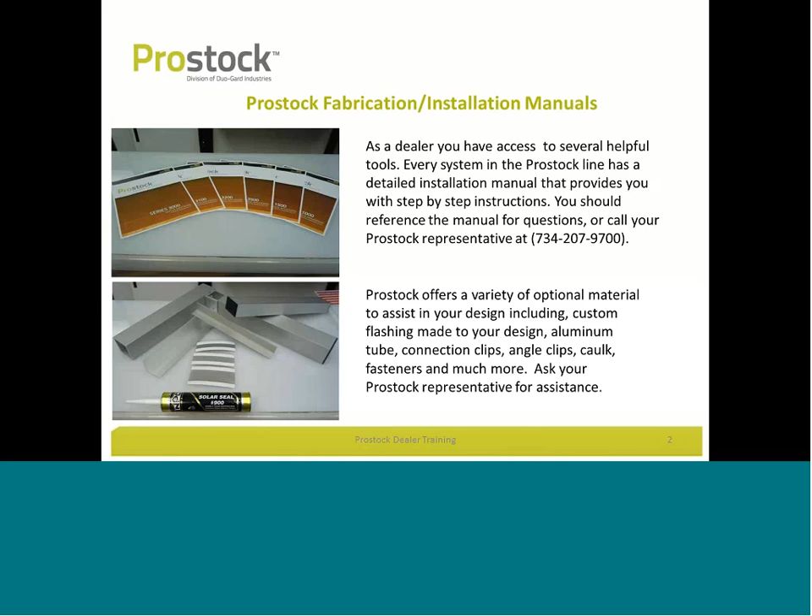When ordering material, there are two documents we'd like you to look at. In your toolbox, you'll find the Prostock Performance Matrix and the Prostock quote request form. Both forms, and all documents within the toolboxes, are specific to the system you're selecting. Having them side by side when filling out the order form might be easier, so printing one and using the other on screen can be a handy way to complete the order request form.

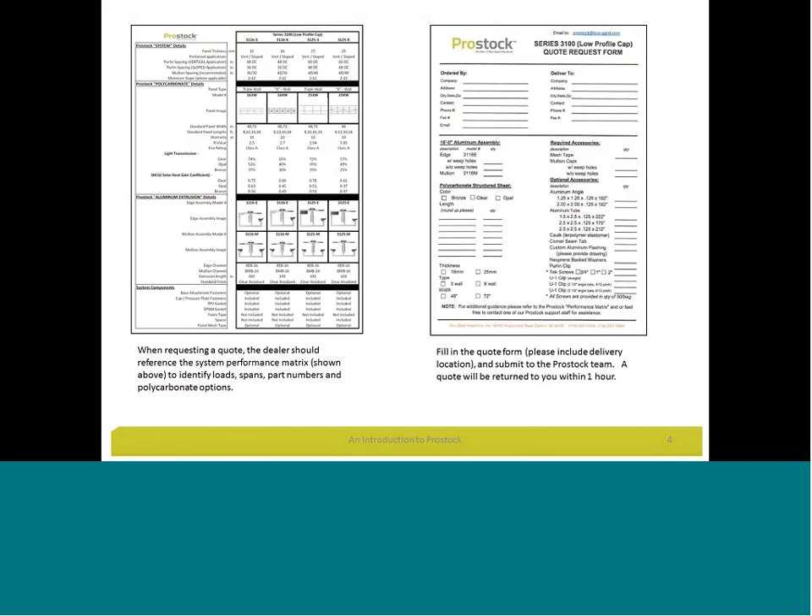When asking for a quote in Prostock, we ask that you do not submit drawings or specifications. Call us for assistance instead. We'll help you with selecting a system, fabrication guidance, and installation guidance.

When your quote request is complete, fax or email it to Lori here at our office. She'll confirm receipt of the order, run it through our Prostock pricing calculators, add shipping and handling charges, and all the details necessary to make sure your quote is submitted back to you within an hour of receiving your request. Remember, we ship Prostock materials as quickly as 2 weeks, so our lead time is very short.

Here's another example of a completed quote request form, just to give you an idea how it works. You fill in the ordered-by information, where you want the materials shipped to, and then check the boxes to identify the amount of polycarbonate sheet you'd like and the length. Please round to the nearest foot for your panel length.

There are some required accessories. We suggest you use mesh tape, so we show that as a required accessory. If you're putting in mullions, you'll need mullion end caps. We also make some of our edge channel and mullion end caps with weep holes already prepped, so if you have a chance, please identify the amount of prepped material you'll need, and we'll ship that accordingly.

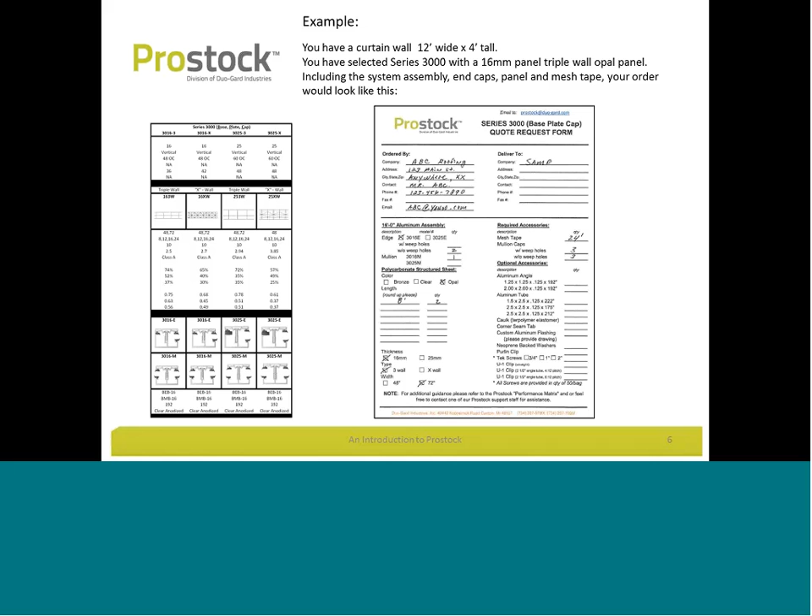Installation details. We're going to bring you 30 years of daylighting experience in the use of these channels, and we'd like to share that information with you now. There are a lot of key elements to working with polycarbonate structured sheet and our aluminum channel systems that we've learned over these many years.

It starts with flashing your system. We recommend that when you install your flashing, you install it about an inch, maybe an inch and a half, above and beyond the system. Any water that might weep or leak into the system won't go into the finished product, but will actually weep out through the pre-drilled weep holes.

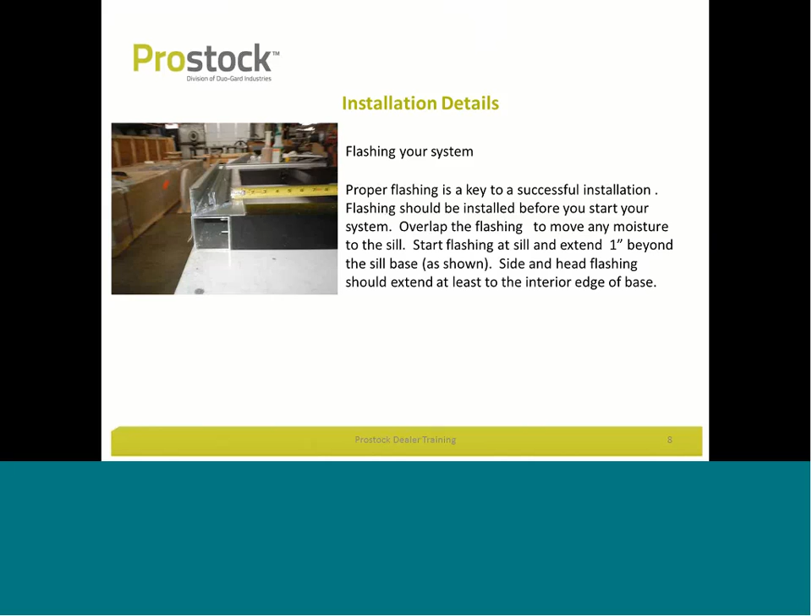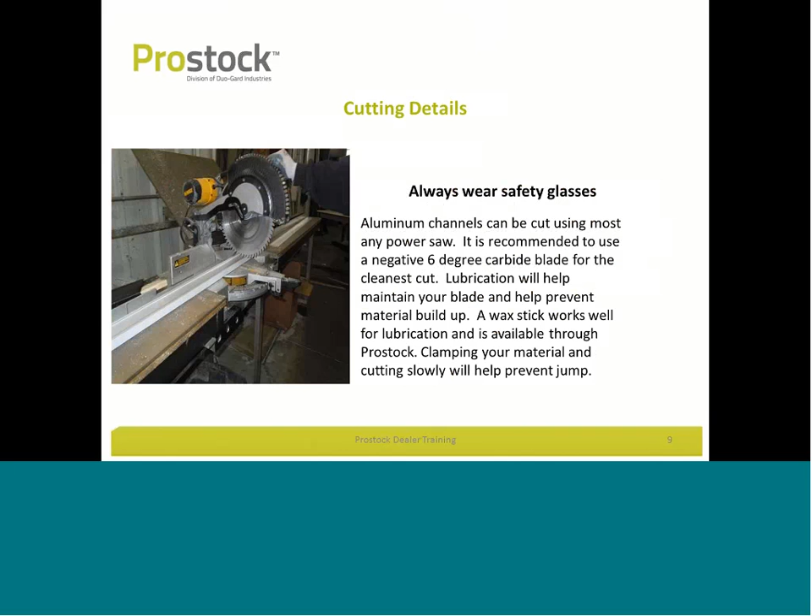When cutting aluminum, many of our fabricators certainly understand how to do it—this is no secret. We recommend using a negative 6-degree carbide blade for the cleanest cut. A little wax lubrication will help the cutting process and prevent your material from jumping. We always recommend wearing safety glasses in the process.

Weeping details: a lot of our material comes prepped, and one area we prep is drilling some of our channels with weep holes. However, if you prefer to drill those yourself, we recommend drilling a couple of holes within an inch of each other using the bit size identified here, about every 24 inches. The important thing is that you drill not only through the base channel but through the screw boss as well, so any water making its way to the other side of the screw boss will find its way through the weep holes.

Notice the mullion cap in the picture below. The mullion cap comes in two fashions: one with 2 weep holes in it, and one with no weep holes. The mullion cap with weep holes will fit at the bottom of the mullion, and the one without weep holes at the top.

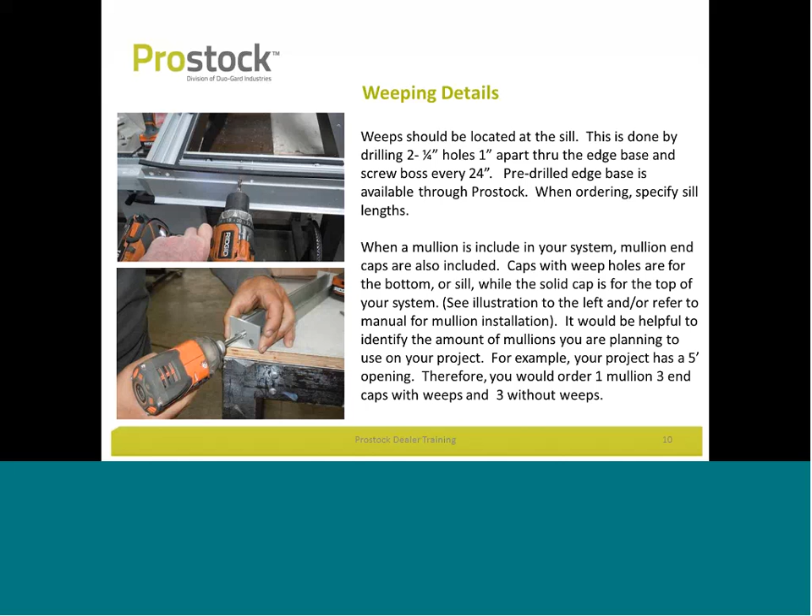Caulking details. Just to make a quick note here, our systems are all dry glaze systems, so typically you do not caulk at all where polycarbonate and aluminum come together. There is one exception, which we'll go into in a few minutes.

Where caulking can be used is when the channel is built and the corners are built with the aluminum. You may want to caulk in those corners, as shown in these pictures. Make sure you don't caulk near the weep holes so as to block them at all.

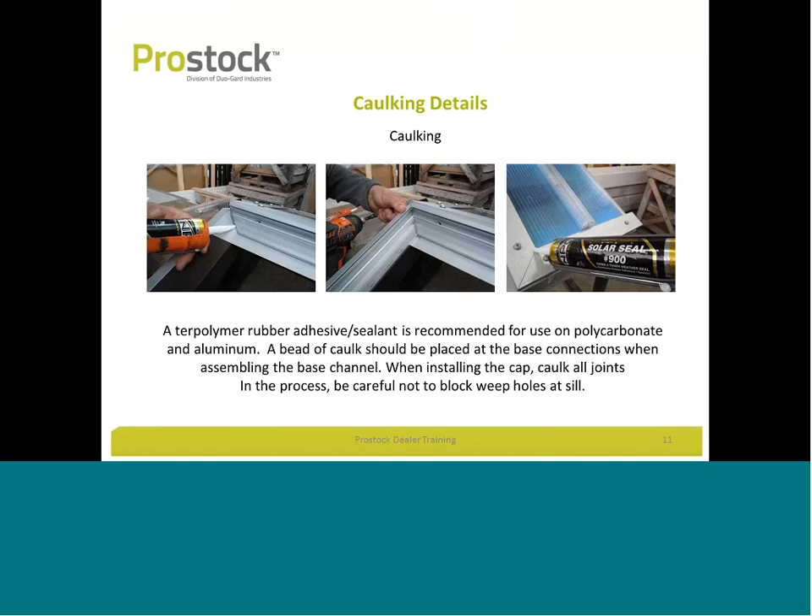If you try to stretch it or roll it in place, the gasket will stretch. When you cut a 16-foot piece of gasket and roll it in place, you end up 3, 4, or 5 inches beyond the edge of the aluminum 16-foot channel. You've stretched that gasket, and gasket has memory—it'll stretch back, causing potential for leaks. So make sure you use your fingers to carefully place the gasket and press it into place.

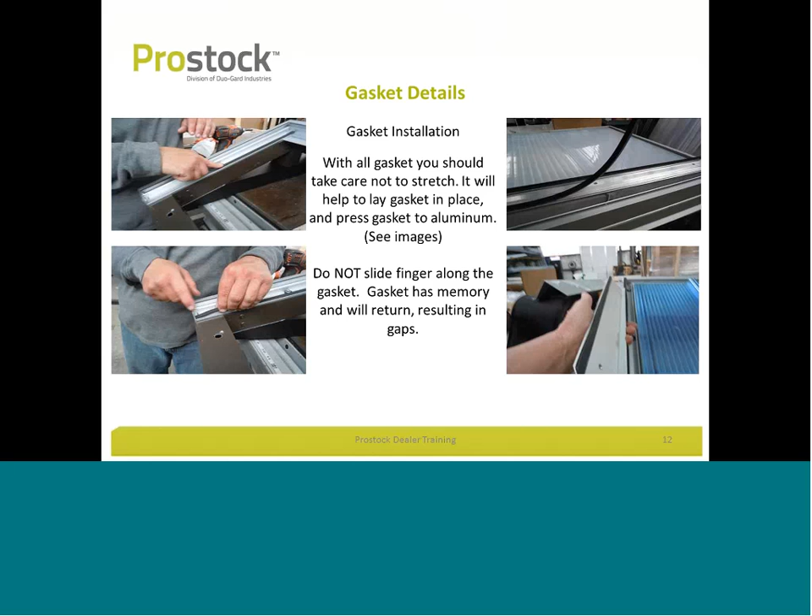Polycarbonate details. There's a lot of information here to read and review. I want to hit on some of the highlight points here.

Cutting polycarbonate is as simple as using a plywood-type blade. It's a very simple process, cuts easily. Make sure that you leave the lining on the film. The protective lining must remain on the film because that lining tells you which side of that panel is UV protected. Do not pull the lining off until you're complete with the project. What we recommend is using a razor blade to simply cut back about two inches or so of the film as you're installing and fabricating.

Leave the liner in place. Once the project is up and complete, then you can pull that top liner off, knowing that the UV protected, or ultraviolet, side is displayed up and in the right position.

Keep in mind that polycarbonate structured sheet expands and contracts, so refer to the manual for cut sizes. Give yourself a little bit of room for expansion and contraction. It expands and contracts greater than glass, so be careful not to make the system too tight.

Do not leave the liner exposed to direct sunlight. That protective film—when you receive the panels, do not store them outside or in direct sunlight. Make sure they're in a controlled environment prior to installation. What will happen is the liners will actually bake onto the sheet and you'll have a damaged panel. So keep the liners on, keep the panels in a safe, dry, dark environment, and only pull that film off when you're ready to install.

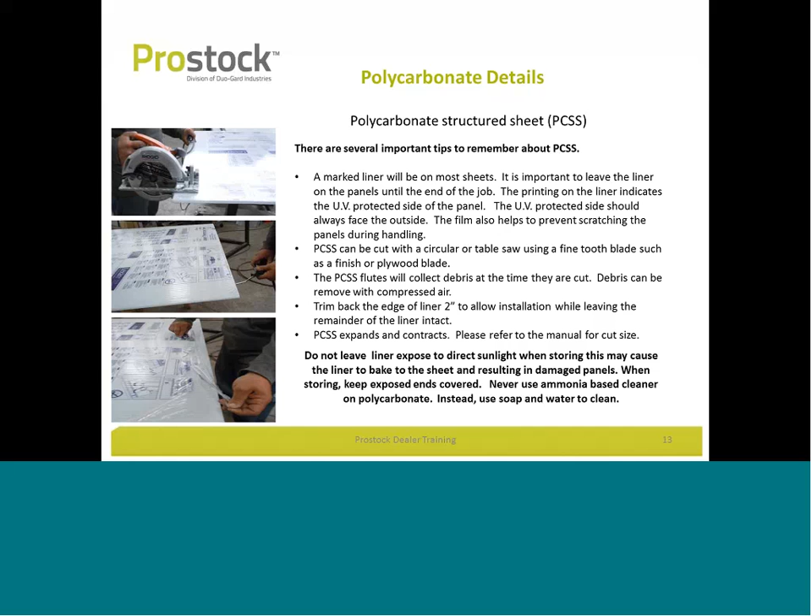Capping details. Some of our systems come with a decorative cap or a protective cap that goes over the fasteners. When placing the cap in, make sure you tap it with a rubber mallet. Do not tap in the middle of the cap, as you will dent it—just on the edges, and that'll snap it into place. Then go ahead and caulk accordingly on your aluminum corners if necessary.

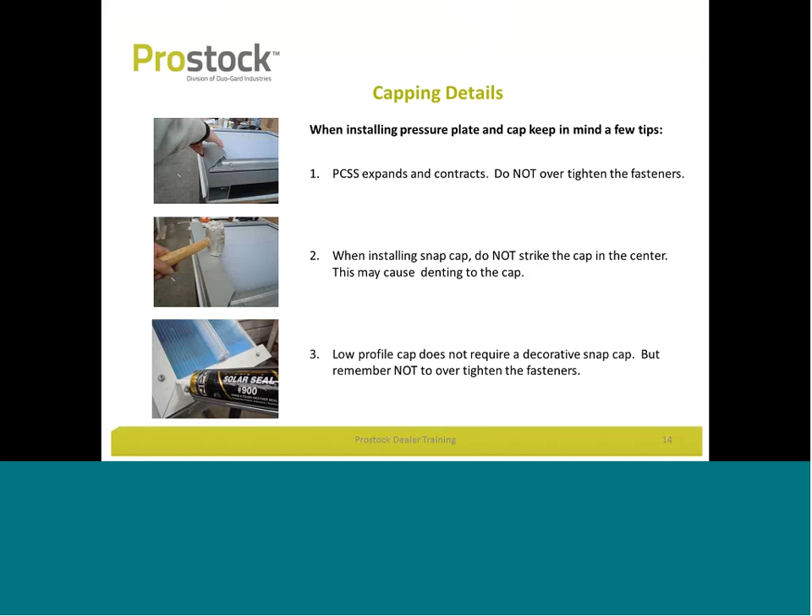I'd like to talk a little bit more about the system specifics. We wanted to make this presentation to talk to you specifically about the Series 2500 standing seam solution that we have. There are some particulars about that system that we'd like to make known, so this presentation starts with that system. The Series 2500 is a standing seam batten panel. It's a great solution used for curved canopies as well as sloped applications, almost primarily used for those two. It's a great look, easy to install when done correctly.

Once again, when you flash this system and you've got your base channel in place, make sure the flashing extends at least two and a half inches or so above your base channel so that any water that might leak in will hit that flashing and work its way out.

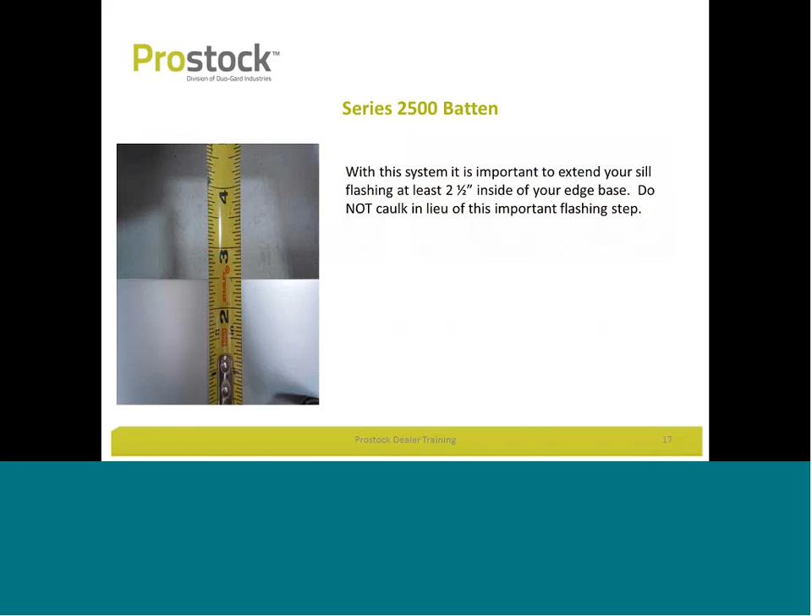When the system is being assembled and fabricated, make sure to caulk where aluminum comes together, possibly installing some caulk first and then placing the two channels together and fastening. If you desire, you can order base channel that already has weep holes drilled into it, or if you prefer, you can order channels straight up and fabricate them in the field accordingly.

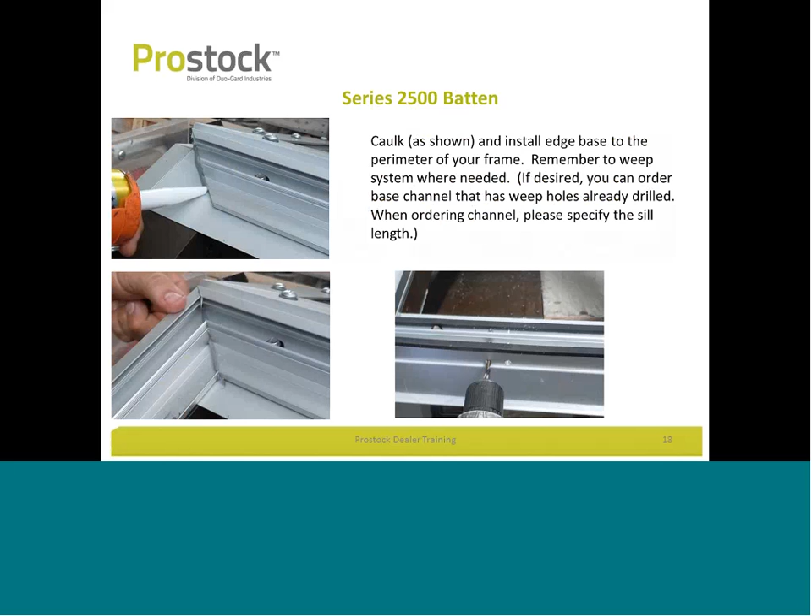Series 2500 batten system: before you start applying any gasket, make sure to use compressed air and blow out your aluminum chips from the fabrication, the cutting process.

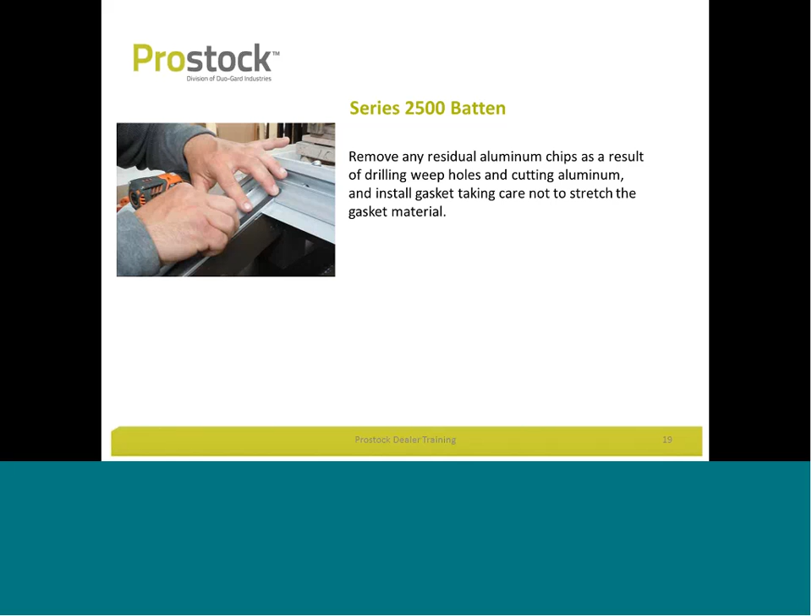The key to installing the batten system is as you get close to the base channel, in order to install the pressure plate that holds the system down, you have to cut back the leg of the standing seam, illustrated here from left to right. Cut back that batten leg about an inch and an eighth to allow the cap to be installed properly.

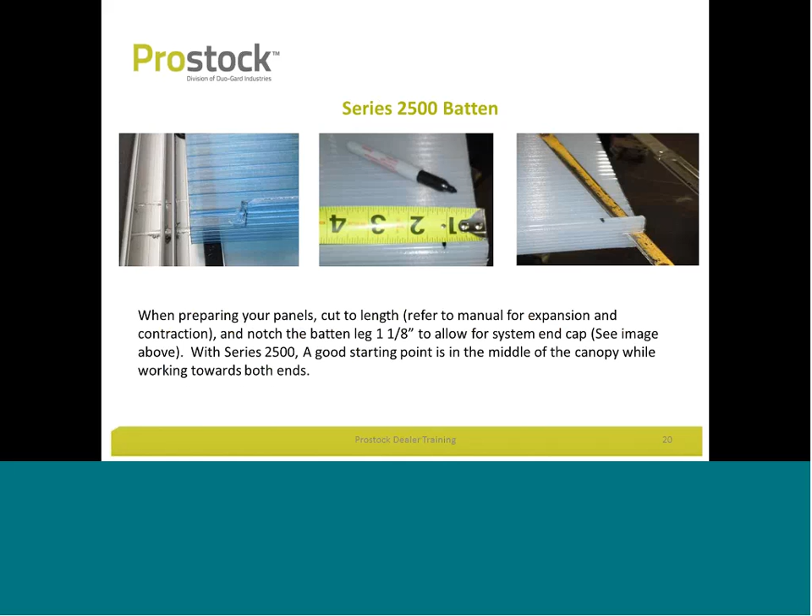It's recommended also that you start in the middle of the canopy with your panels and work to the outside. That way you'll have a nice, clean, evenly spaced project when you're complete.

The batten panels use a clip. A clip goes up and over the top of the standing seam and clips to your purlin. Those come with your system.

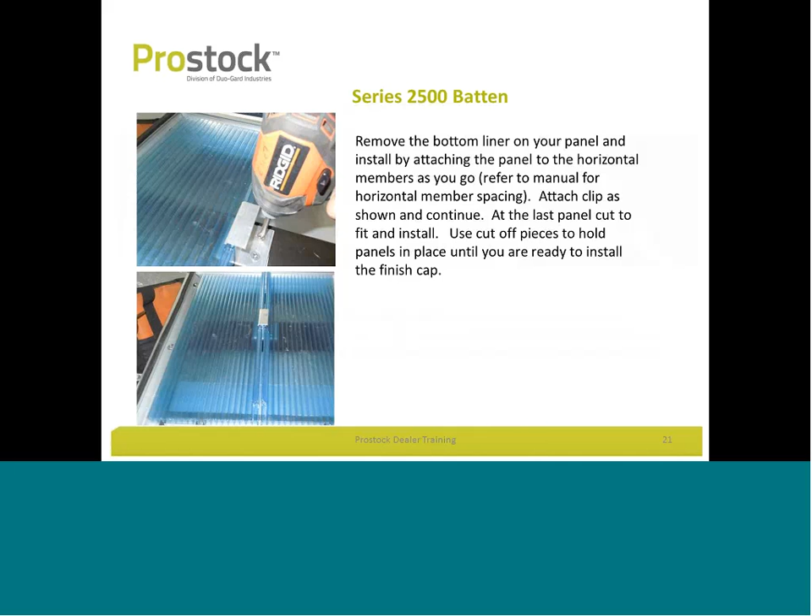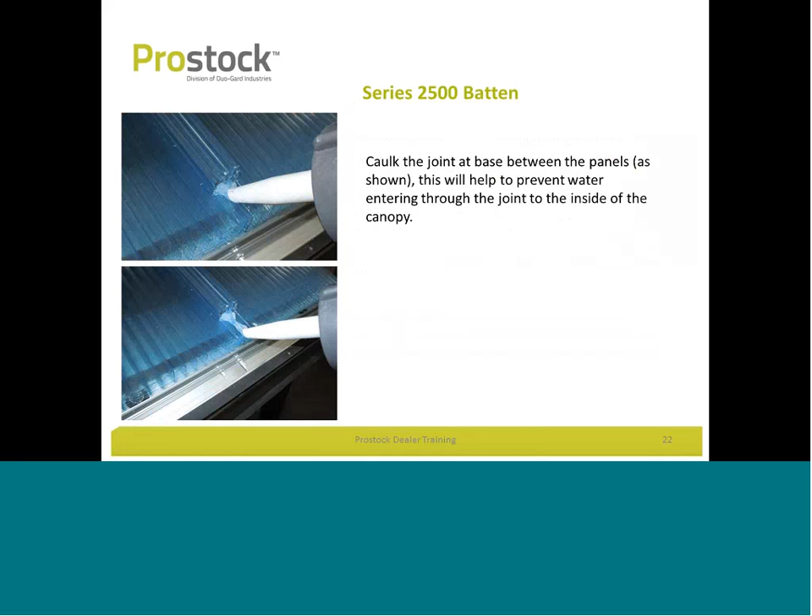And then finish up by caulking along the joints of the aluminum if needed, if desired.

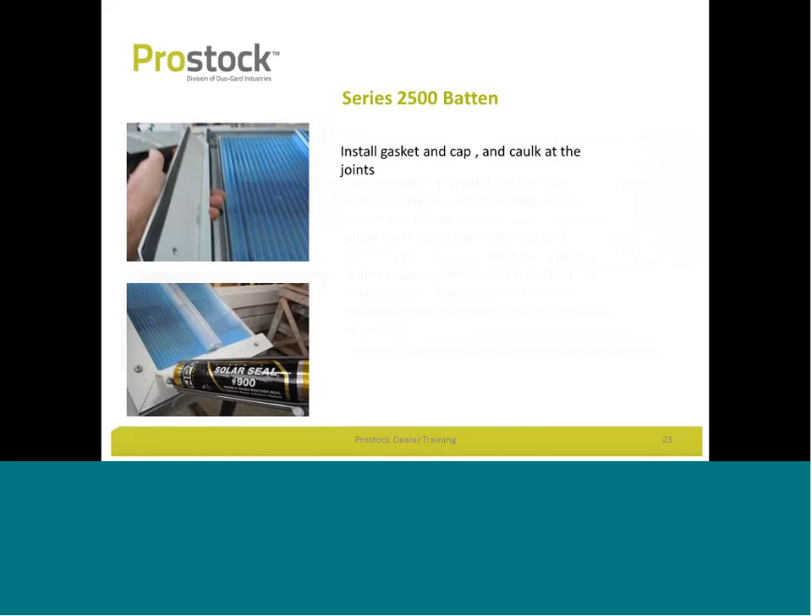On top of the standing seam, as you see in the top photo, the clip is in place and your pressure plate is in place. Now it's time to add the batten cap. Your batten cap should fit from edge to edge, just about a quarter inch short, because there are little caps that go on the end of the batten. As soon as you get that batten cap on, you put these end caps in place and you're good to go. This batten can be installed with a rubber hammer.

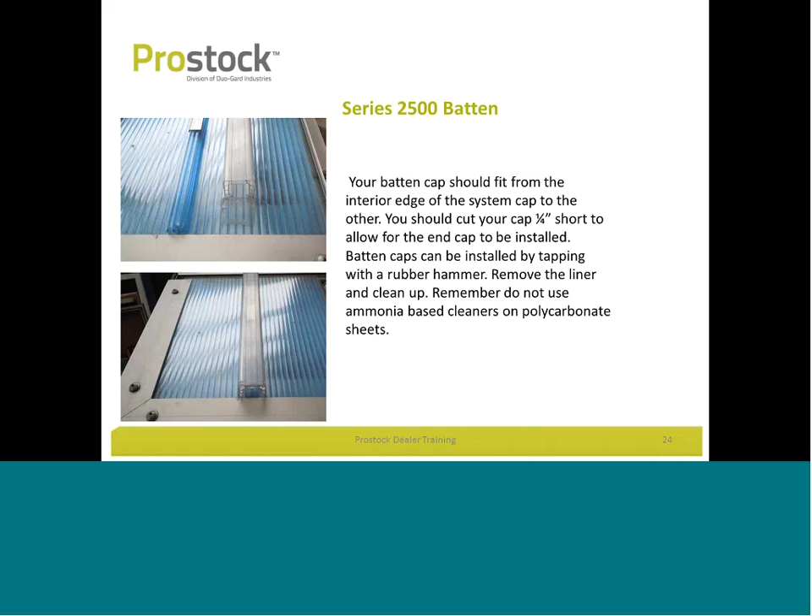We talked about the Series 2500 because it's an important, common system, and we want you to be aware of some of its pitfalls. The next several slides talk about each of our individual systems available through ProStock. The Series 2500 is one of them.

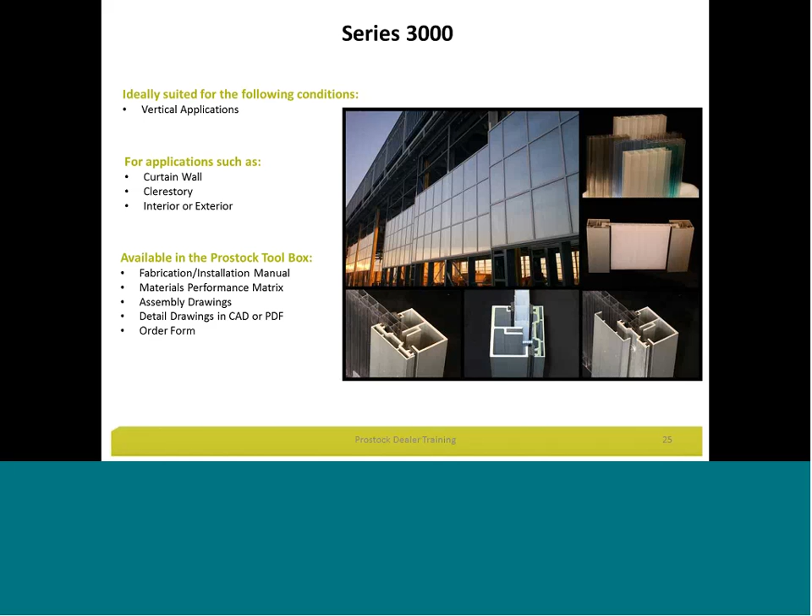The next system is the Series 3100. We use this system for sloped as well as vertical applications; it's okay to use on vertical. It's got exposed fasteners, so that's your call on that option. But notice it's a very low-profile system, designed to allow water to shed off easily off of a sloped canopy, as an example, or skylight. Generally, we recommend a 2:12 pitch minimum for this particular system. It can also use a 16 millimeter panel or a 25 millimeter panel.

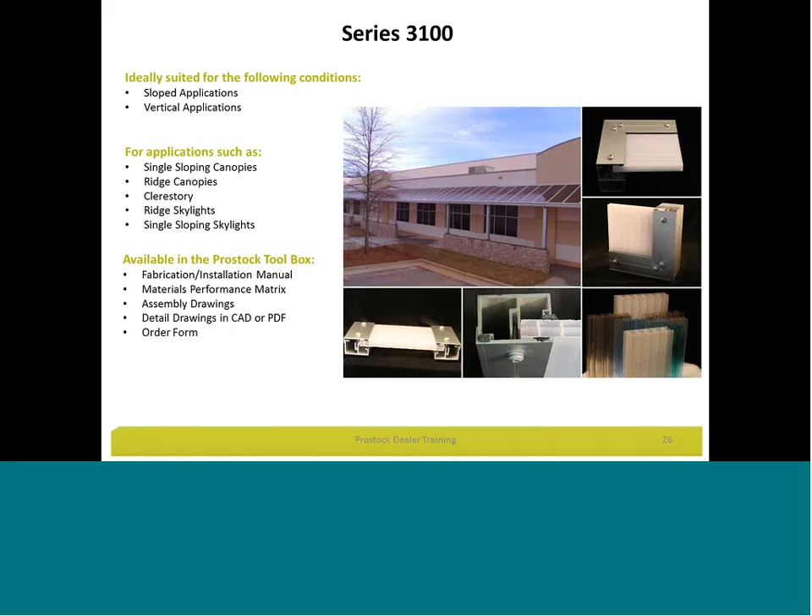The Series 3200 is a lesser system, lesser in that it's not as robust, not as strong, but it's less costly as well. It's a good solution for simple applications where you have enough structure to use, where snow loads may not be as strict. You can use a 20 millimeter panel, a 16 millimeter panel, and if necessary, this is the only system where we would use a 10 millimeter panel if desired. There's a little prefabrication that goes on with our base channel, but if a 10 millimeter works for your project, please let us know.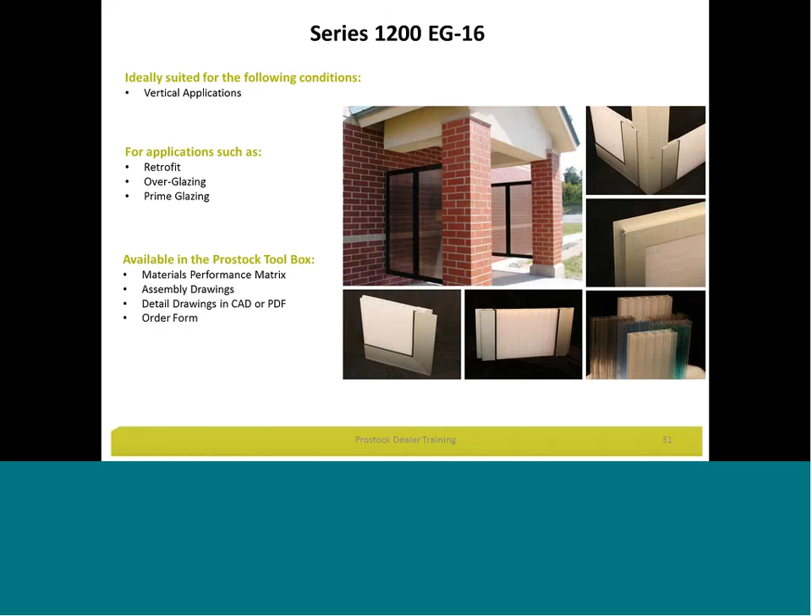And finally, our Series 1200 EG-16, a very simple system, non-gasketed, used solely for retrofitting and overglazing in vertical applications. It's so simple that we don't provide a lot of information for it because we have a performance matrix, assembly drawing, and an order form. What you see is what you get, pretty straightforward.